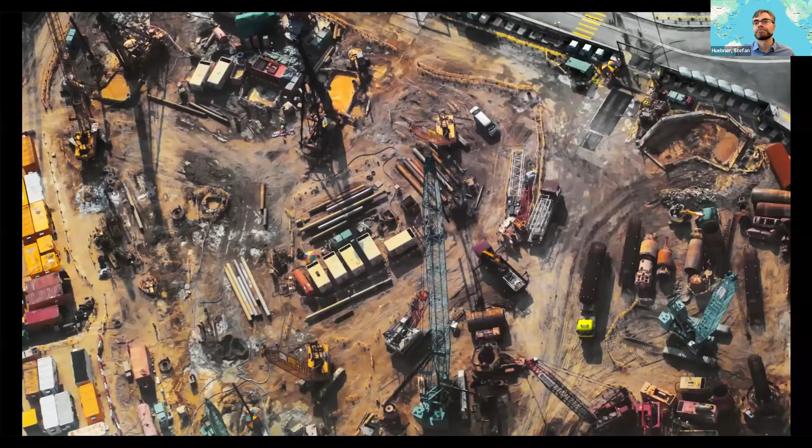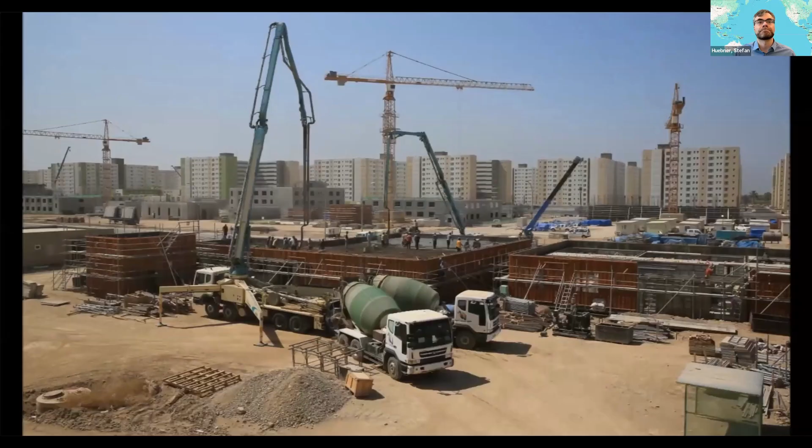That's why we manufacture off-site. Just like the automotive, aerospace, and energy sectors, we believe real estate too should be built in factories, in clean, safe, and precise environments. This approach removes the need for conventional construction sites, minimizes environmental impact, improves quality, and delivers projects faster.

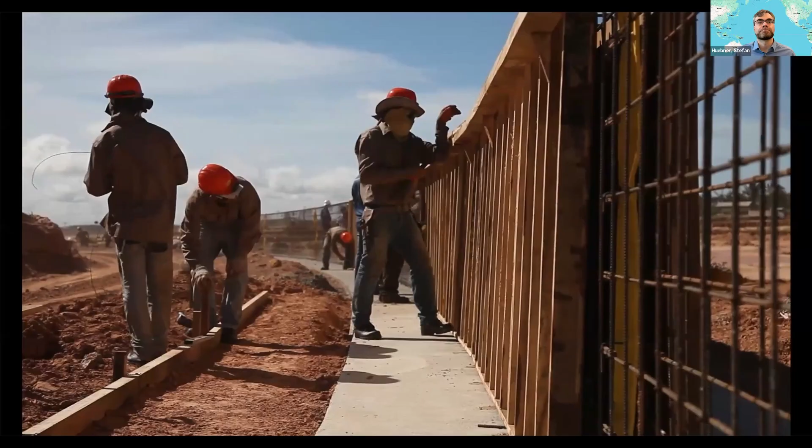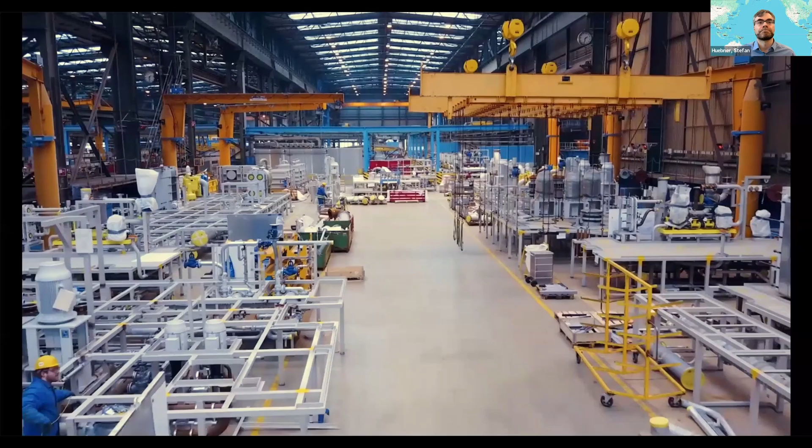From private residences to public infrastructure, our portfolio spans floating homes, hotels, and exclusive leisure platforms, eco-resorts and wellness retreats, floating port and harbor solutions, mobile hospitals, and offshore logistics hubs. Each solution is designed to enhance life on the water, delivering exceptional living, leisure, and infrastructure without disturbing the shoreline or requiring heavy site preparation. Unlocking massive potential for developers to create private, sustainable destinations.

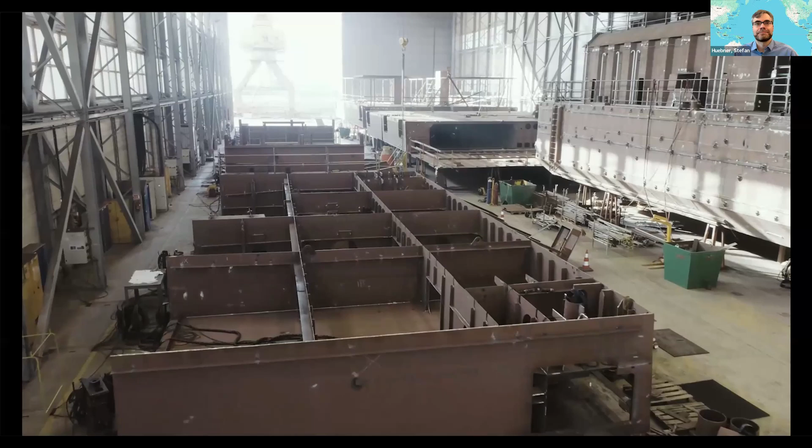Our iconic creations redefine life on water. In Dubai's Business Bay, our floating villas set a new standard for waterfront living, panoramic skyline views, private marina access, and sustainability at the core. Currently under construction, Oshaya is a next-generation floating entertainment platform designed for high-end hospitality, live performances, and iconic events on the water.

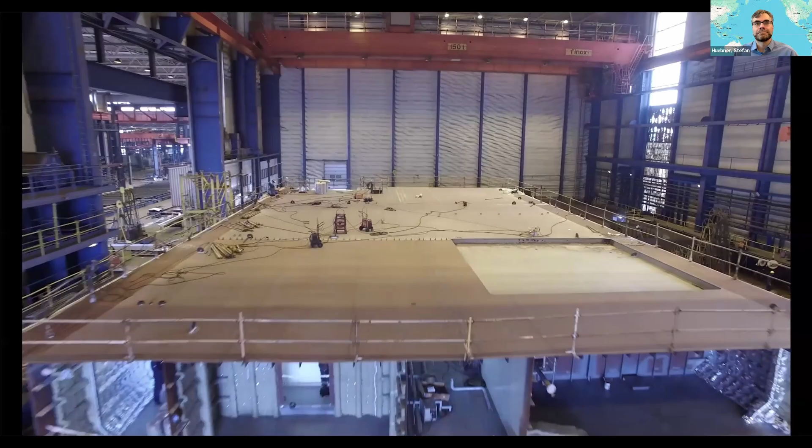We delivered a 10,000 square meter offshore island for the iconic Burj Al Arab, choosing a modular pile-supported approach that beat the conventional land reclamation option, setting new benchmarks for minimal environmental and operational disruption. And the world's largest floating villa, 6,000 square meters of self-sufficient living, complete with integrated power, water, and sewage systems and propulsion. Engineered for privacy, luxury, and autonomy offshore.

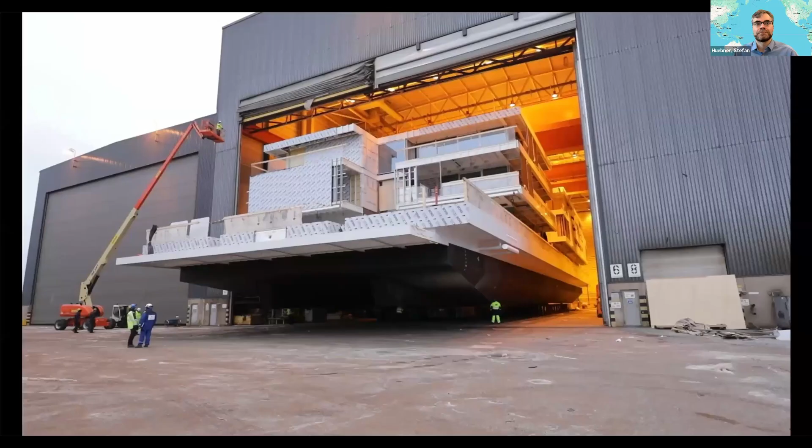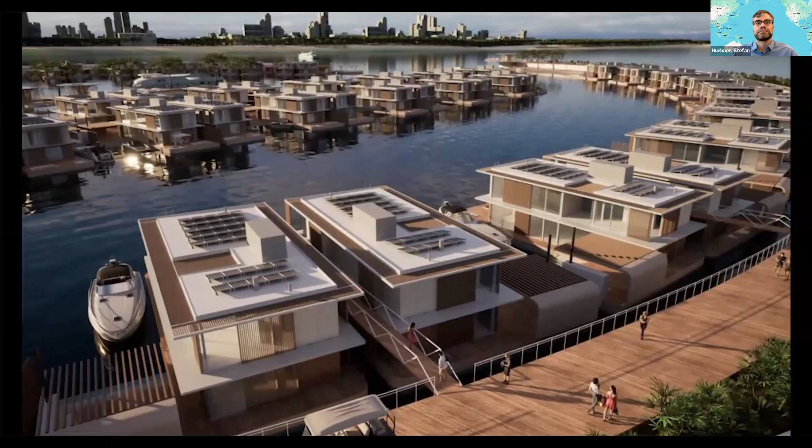All our solutions are manufactured and tested off-site, then transported and deployed with minimal on-site work. From cities to remote islands, our floating structures are built to perform in any climate, with speed and precision. We don't just deliver buildings, we deliver fully integrated floating assets, ready to operate offshore or connected to existing utilities from day one. Your vision, we design, build, and deliver.

All right, so I hope you guys enjoyed the video. Thank you for the patience to watch. But it's a good summary of our market positioning. We are positioned as, if we must describe it, real estate developers on the water.

The content, I'll try to be very brief to talk about these topics here. The two zones of business that we work for are infrastructure and commercial and residential. I will go quickly one by one through these 8 categories, 4 in the infrastructure side, 4 in the commercial and residential side. Then I will talk a little bit about city-sized solutions and explain very quickly how the shipyards will be the driver for the floating revolution.

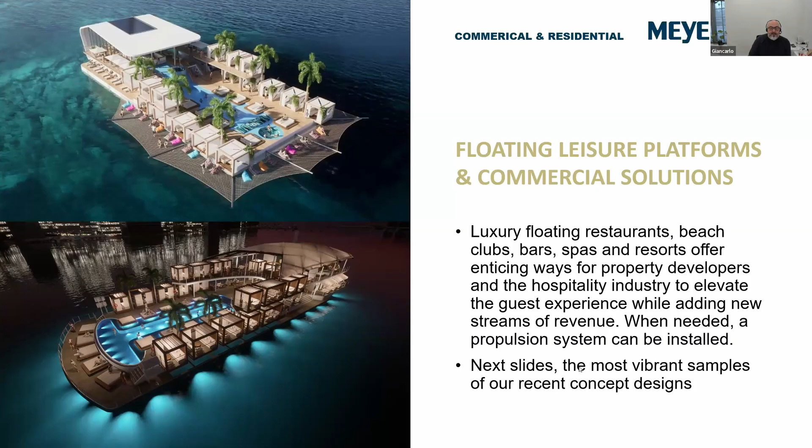This is our flagship so far, the beach club of the Burj Al Arab. It's an on-pile approach super platform. It's working very well, very successful project. This building was built in Rauma, Finland, in slices, transported over to Dubai and reassembled in place. The only part that is local, as you see in the picture, are the grass, the trees, and the water of the pools.

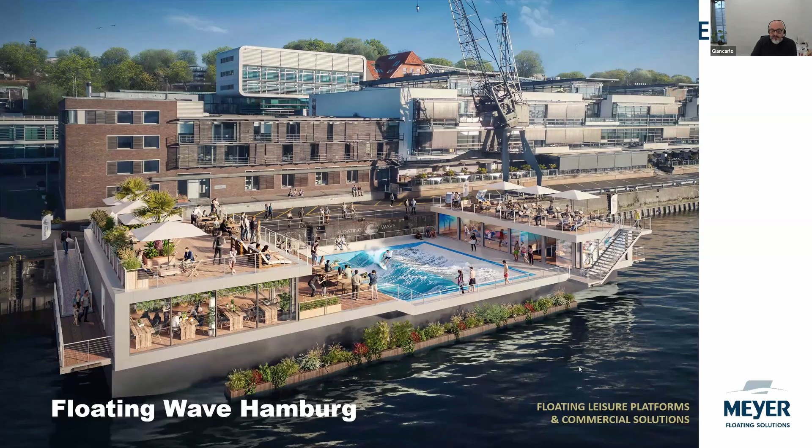More samples of different shapes and how the creativity flies when we talk about leisure on beach clubs. In the pictures you can see how and why this is booming. This is a revenue fountain. People love to go there, to be poolside and seaside, and they start spending money when they feel comfortable, surrounded by beauty and equipment that brings them near to the water, gives them the water experience. So they are happy to be in the water and they start to spend money. Sorry for my direct approach, but this is how the market goes, right?

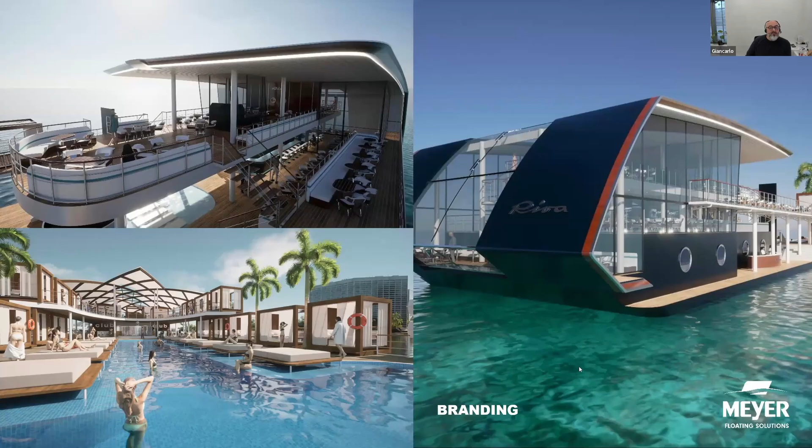This is a good sample of branding, how we twist our design to match specific brands. In that case, we have the famous classic boats from Italy, Riva. We twisted our successful Solstice design to the Riva, and below you have a tropical approach of the same platform. You cannot tell, but these two projects share the same platform. They are just twisted to different brands.

It's made to please the eyes of cruise ship guests. The cruise ship would navigate around this island, so people will see it from outside, then moor nearby at anchor, and with tenders they would join this amusement park, floating amusement park. So this is driven to the cruise ship public, as well as land local customers.

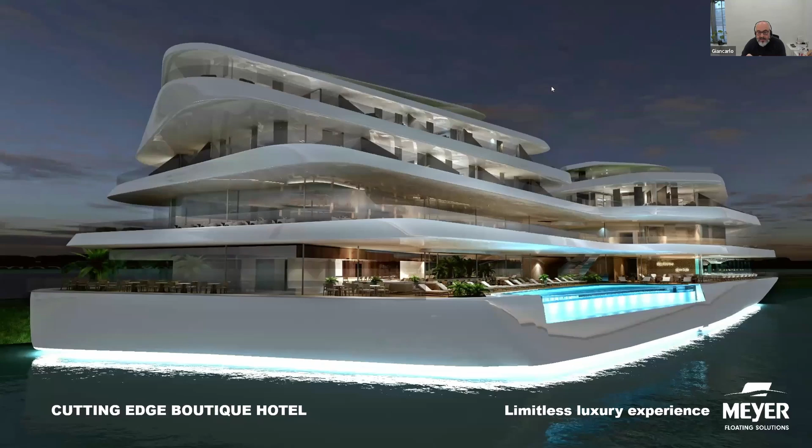Then a little bit about hotels, a very important piece of the leisure entertainment business. We have been developing concepts of all kinds. This is our most luxurious concept developed, a budgetless concept for a boutique hotel. Then you have 3 other concepts with totally different approaches.

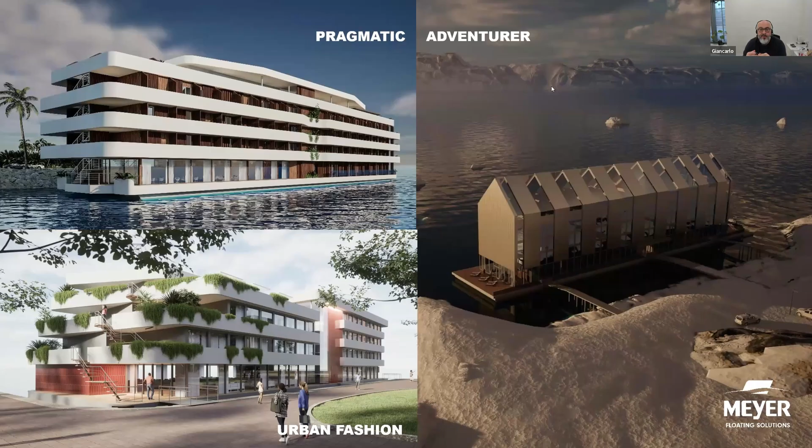This is our latest adventurer concept, for Lapland. It's a 12-month-per-year experience on the ice and on the water, and it counts on an archipelago of different saunas and cabanas all around.

Then about villas and residential solutions. Residential solutions, we are talking about more than one home in an island, in a platform, right?

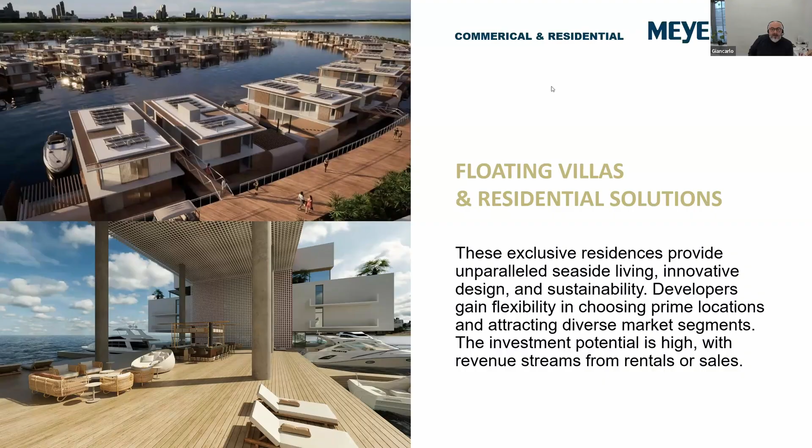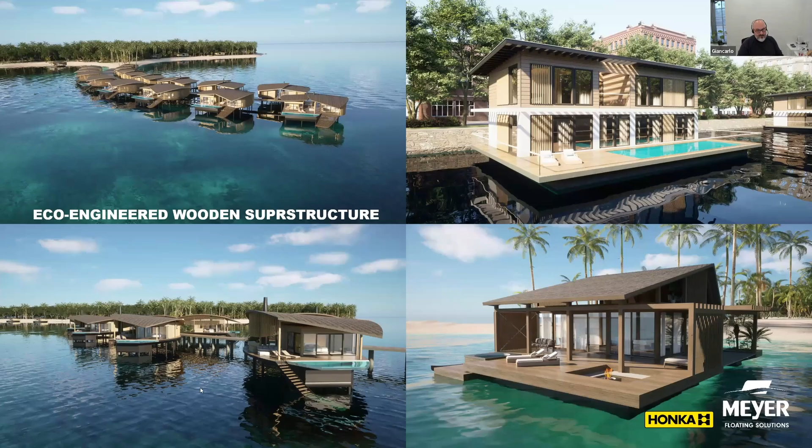Here is our latest conceptual effort: an eco-engineered catalog of villas, 7 different designs of wooden superstructures and steel pontoons, designed for resorts, for wilderness, and for urban centers. They are all made of wood together with Honka, one of the best prefab wooden house builders in the world.

One more view of the possibilities of these wooden villas. We can build on piles, build floating, or build on the beach sands. We can prepare a pile frame on the sand, and with long arm cranes, install the villas fully built off-site, on top of these pillars in the beach sand. Again, I'm reinforcing here: we do the local surveys, the design, construction on site, logistics, installation, and the startup at the site.

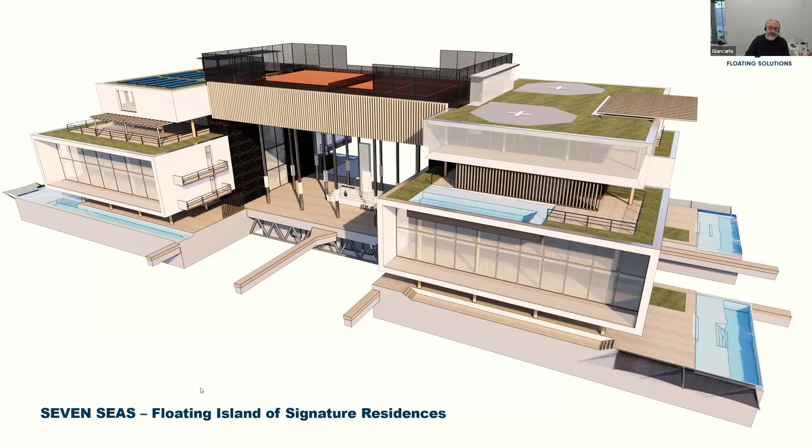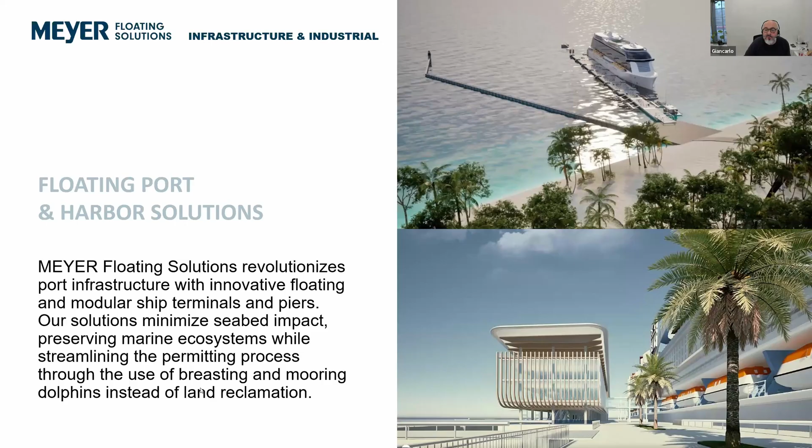Then a bit on the infrastructure side. We have a suite of solutions. If you guys have been at the latest Congress in Espoo, Finland, that was my presentation: solutions that enhance port operation for cruise ships. This is the basic idea, a hybrid solution where part is fixed and part is floating, but everything is built off-site and installed in place.

A bit on the anatomy of each part of this idea. We can see the regular dolphins and the floating pontoons, and two kinds of breakwaters: one for soft waters and one for heavy waters. You have the caisson type on the right.

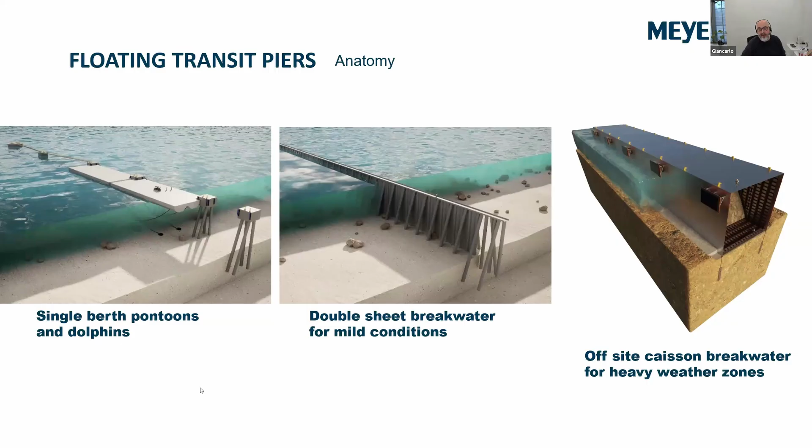This is expanding the idea of the floating disembark port. It's the transit pier taken to the leisure level. We simply develop leisure and service facilities in the floating port, in the floating quay, with an amusement park, science park, and beach club. The idea here is to buffer the public away from the beach, so the public will access the beach slowly and in an organized way, visiting the island, which is a natural sanctuary.

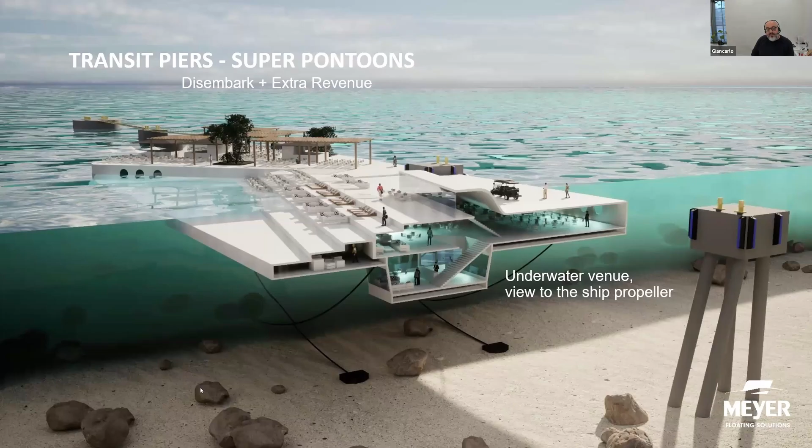This is a section through the same project, showing that we also have underwater venues.

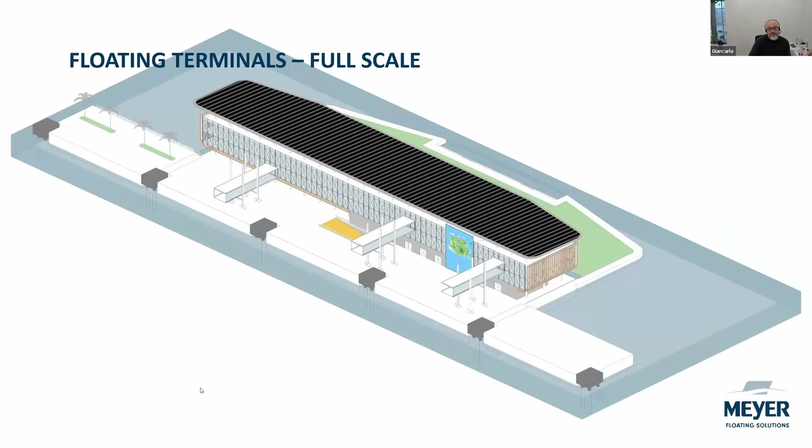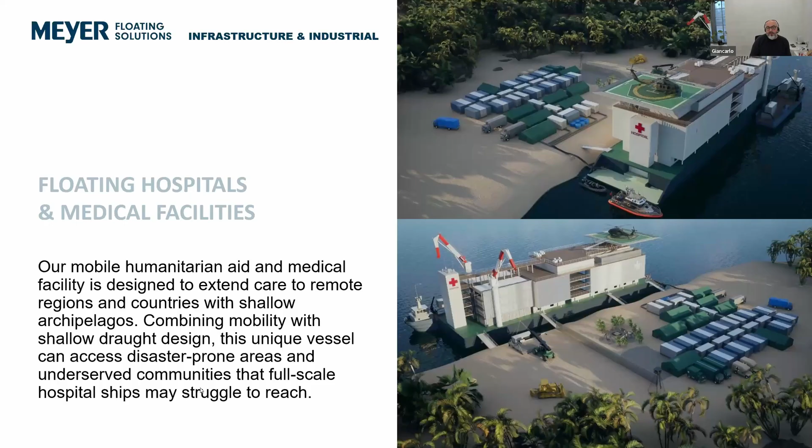Another product we're very proud of is these different solutions for hospitals and medical facilities - in that case, a crisis solution for earthquakes, tsunamis, and wars. It's a hospital assembled on a barge with flexible draft, so you can beach it very near the sands, and you can deploy two military-grade hospitals on land.

And all kinds of infrastructure we have been working on. In the upper case here is a data center which uses seawater to cool the equipment, and underneath you have a flexible service platform for desalination and power generation.

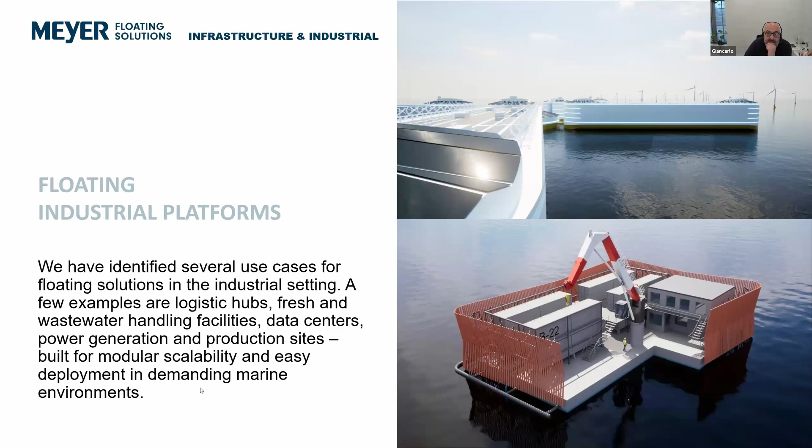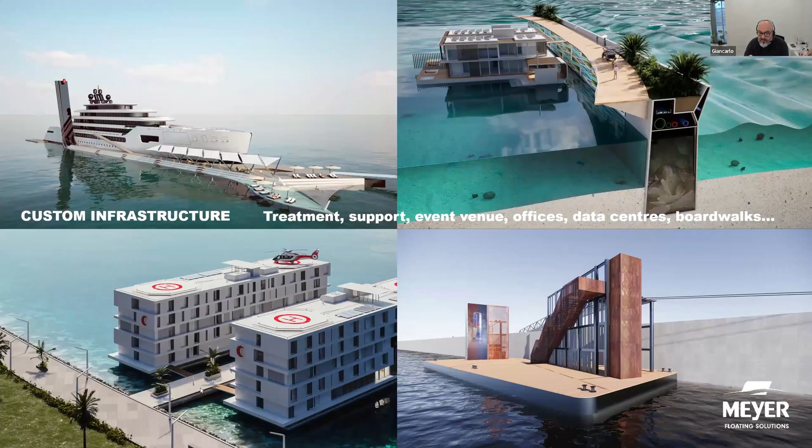More samples: we have infrastructure assembled along a walkway, all on piles, with a small bunker below for diesel. And all kinds of different solutions - caissons, stairs for rivers with very wide tide variation. We designed these beautiful stairs.

We have another kind of hospital, in that case totally suited to Muslim culture. And we have the ultra luxury disembark transit piers.

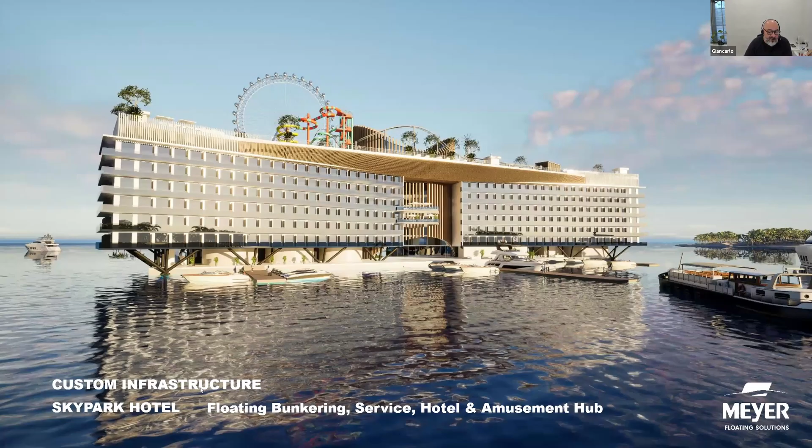Just some samples, and this is one we like a lot as well - an ultra utilization of a bunker platform. It's a very deep hull here, bunkering all kinds of things, and on top they have offices, a hotel, and an amusement park. This is the maximized utilization of a bunkering platform. It's the Skypark Hotel.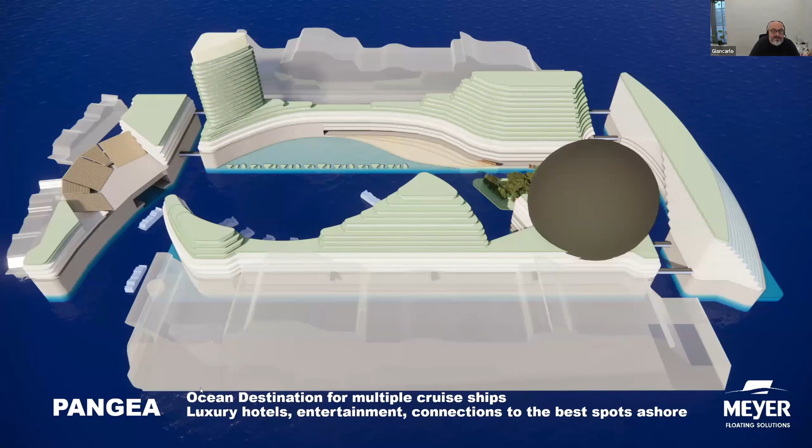And this is very low detail in this image because it's a bit of a secret. Actually, it's an actual secret. It's entertainment. It's the same concept as the terminal, but for passengers. It's a suite of attractions that will work itself as a destination.

Do you want to do questions now, or do we want to go on with the next presentation? It's up to you, I don't know. I would suggest now, because if they see all three presentations, they will not remember what question goes to whom.

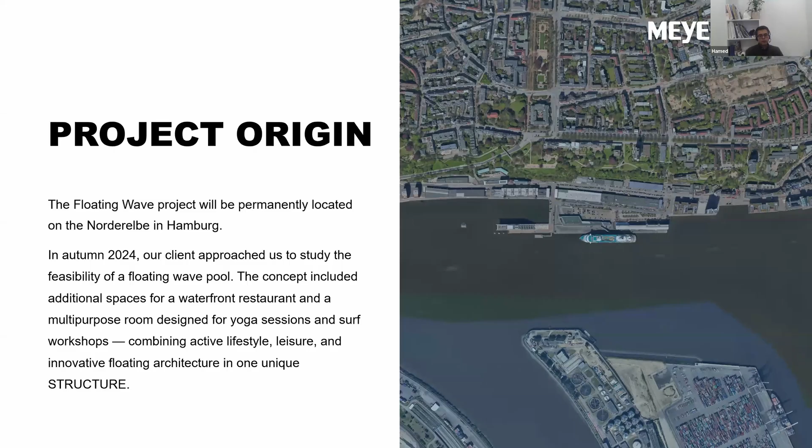I would like first to quickly give you some background of the project. It was early autumn of 2024, maybe October, that we got the first contact from our client from Germany, who was looking for a feasibility or preliminary study for a recreational platform permanently moored in the Hamburg land, located in the Elbe River, exactly in front of the iconic office building Dockland. This is the situation after installation, which gives a good idea of the whole size of the platform.

The main idea of the project was to have three main functions on this floating structure. At the middle, the most important function is this surfing pool, and the client would also like two other functions: a restaurant on one side, and a kind of multi-purpose room which can operate as a yoga or exercise space, or a workshop room for surfing later.

After we received the first call, we started to study the location and site of the project. The first thing we noticed at the beginning was this very diverse water tide in the location - almost 4 meters different water level per day, and it happens 2 times like that. We have the lowest water level, and later in the day the highest water level.

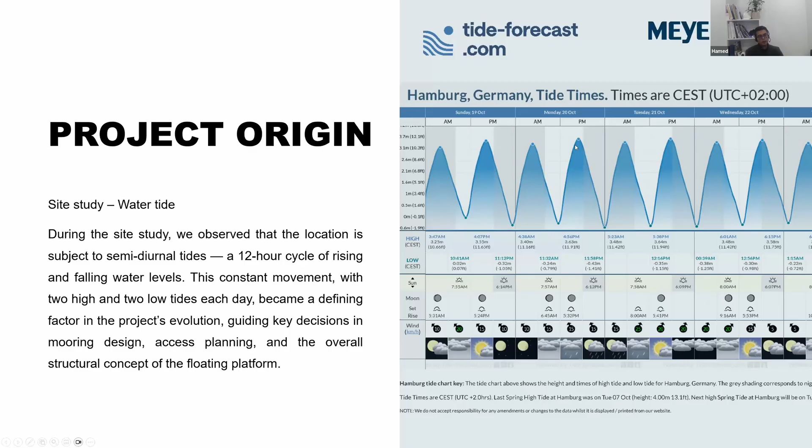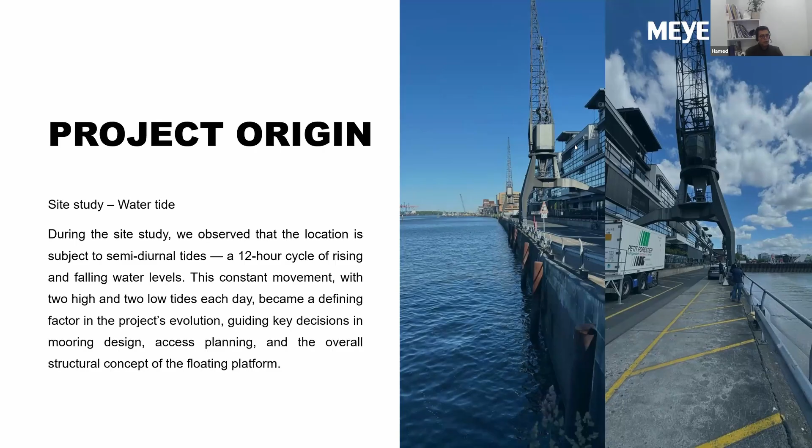This is a good example of seeing the differences. About 6 or 7 months ago I traveled to Hamburg to see the site for the first time, and I took the left side picture around 8 a.m., where you can see a very good water level. But the other picture on the right side I took around 1 p.m., showing how the water level is low, and you can clearly see the riverbed.

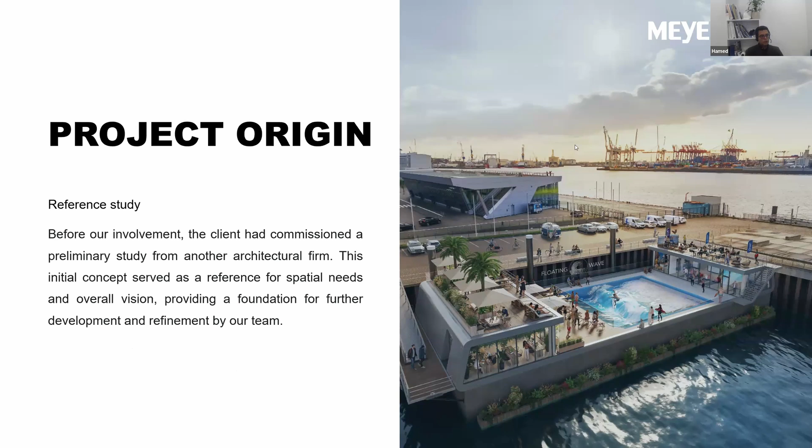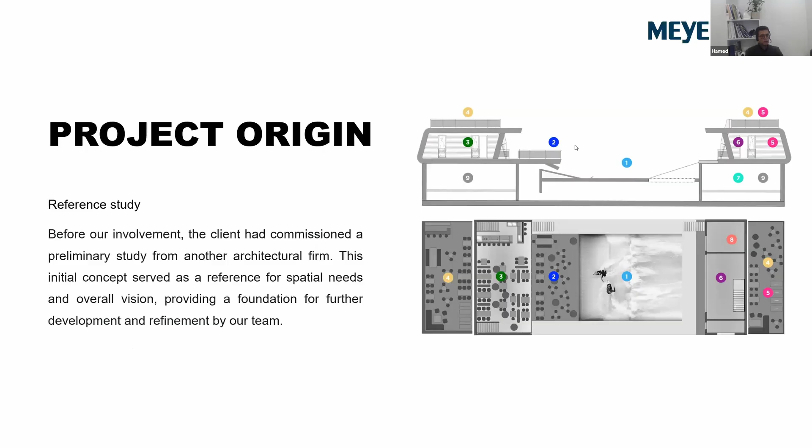The second important thing we were focusing on at the beginning of the project was the previous study done by the client in Germany. The other company did preliminary sketches for the client, which we also received and used as a kind of basis for our design, because it gave us the whole idea of what exactly the client was looking for.

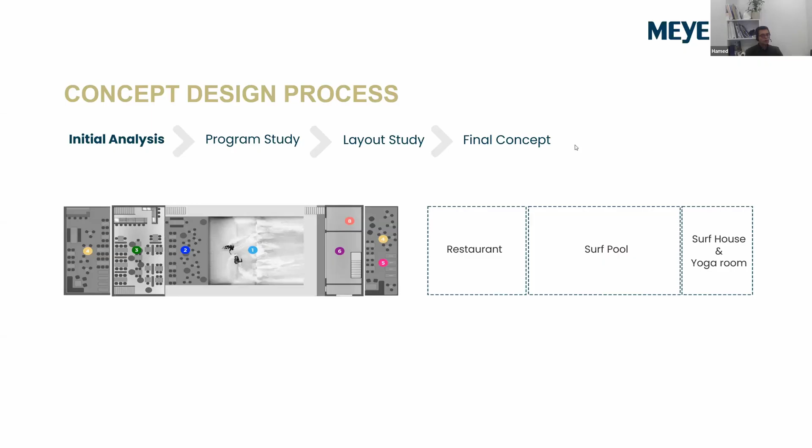So let's go to the design. First, as I showed on the previous slide, we received these sketches from the other company and started to analyze and understand them. As I mentioned at the beginning of the presentation, we had three main departments or functions on the floating platform: the restaurant, the exercise or multi-purpose rooms on the sides, and the surfing pool in the middle.

Then we started to go more deep into the program study. Based on the whole study we did for all required spaces for this project, we tried to create the DNA of the project - what kind of spaces we were looking for.

We have the back of house and front of house. All the back of house spaces can be stored inside the pontoon, which doesn't need specific access to daylight or direct access from the land. But we can keep all the client spaces, like the dining room of the restaurant and the main office or entrance room for the surf, on top - on the middle deck or on the superstructures.

Then, before studying the main geometry and design of the whole structure, the second thing we started to study at the beginning was how we wanted the connection between this structure and the land, because it's very important to consider that this project will be permanently moored and installed only once, remaining in the same position for the rest of its time. Maybe you need maintenance after 10-15 years, so for a long time it's going to be unmovable.

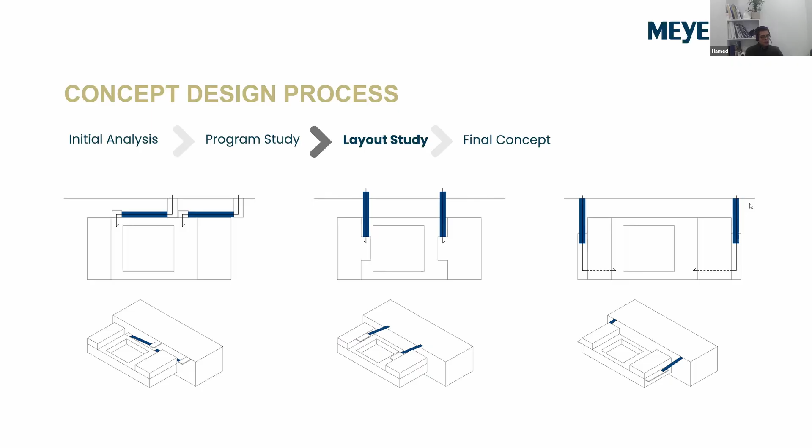After this phase, we came up with the development of the main structure. At the beginning, we simply created these boxy shapes - the pontoon, and then on top we have the two superstructures, and at the middle we have the pool. Then we added the connections to the land and a cantilevered platform on each side.

In the second phase, we started the optimization. We could reduce the use of steel for the pontoon, which is very important and a normal process in ship construction, in order to reduce the cost of the project - we do this optimization all the time.

We also got a better idea of how the surf pool actually works, which I'll show you later on some other slides. We noticed that in any case we needed some area higher than the rest of the platform, or the bottom of the pool on the other side, to create the specific angle for the water coming from the pumps - the main code for creating the wave on top of the water. So we needed two different levels on the main deck of the pontoon, which is how we arrived at this condition I'm showing with the mouse - this is the place where we store the pumps.

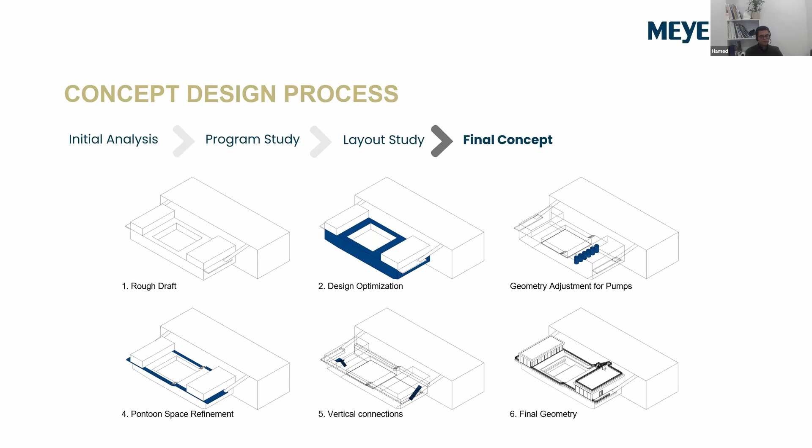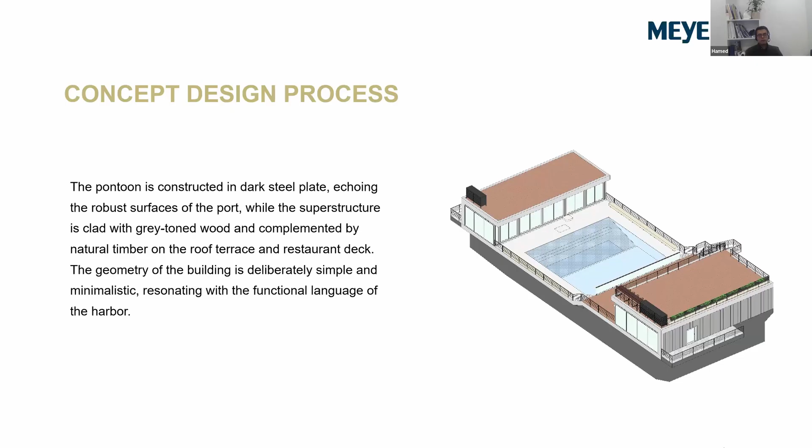So at the end, we get closer to the final geometry, looking very simple, but believe me, that is very challenging because of all these gathered functions in a super small compressed platform. It's very technical. We have the surfing pool, the restaurant, and all those back of houses for the surfing pool. And of course the whole nature of the project, which is something in between floating and sometimes being on pile, that later I will show you how it works.

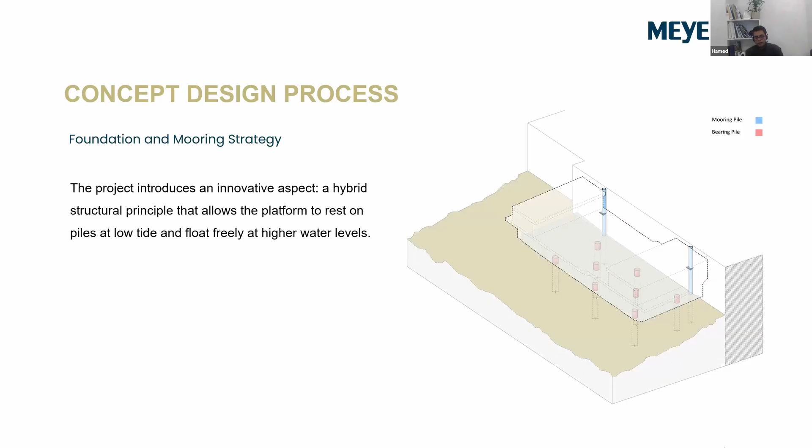Yes, so this is the main idea that we have. At the beginning of the project, I showed the situation with the water tide. In any case, we cannot float the whole day, so the idea is: when we have enough water in the river, we start to float. We have a specific threshold for floating, and it happens for a few hours per day. Then when the water goes down, we start to sit on the pile. We have basically 10 piles for sitting on, and 2 mooring piles that let us have this vertical movement with the water tide.

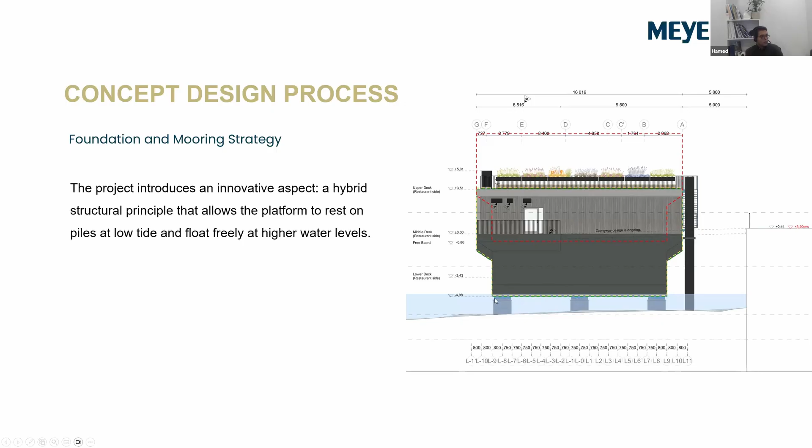So again, here you can see the connection and the different situations, different heights of the building, or different vertical locations of the building based on different water levels. As you can see, when the water is going higher, the structure is also going higher with it. This is the old idea we had.

Now we have a different idea, but we are still working on it. It was like we might need a kind of hinge at the middle of the gangway because of the water tide. So then it basically works as a kind of fuse, so that when the water is very high, instead of having any damage on the main structure and also on the bridge or gangway structure, this hinge at the middle starts to work. So then it makes it more controllable. But in general, in any case, it should be with the wheel and also with the hinge.

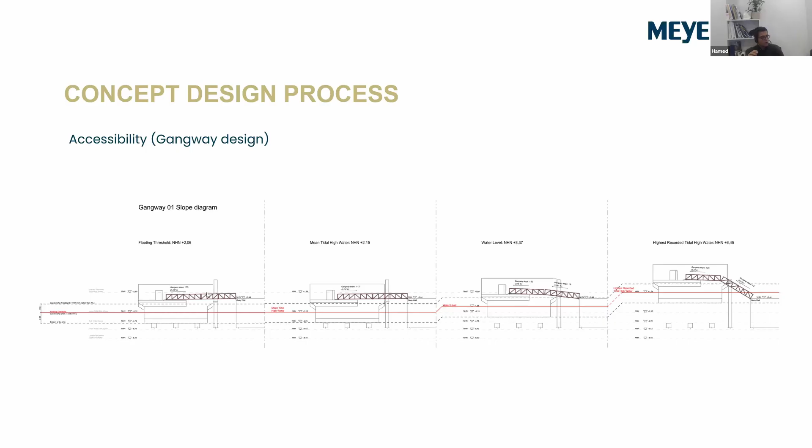So one side should be with the wheel and the other side with the hinge. With this idea of having these 2 systems on both ends, we can also have the liberty of having horizontal movement during the different water levels.

Yeah, so these are the layouts that we get. This is the lower deck, inside of the pontoon. At the middle we have the pool. Here you see all the pumps, these 6 pumps. On the left side, on top, we have the welcoming desk of the surfing pool and also the yoga room or multi-purpose room. Beneath it, inside the pontoon, we have the specific space for that purpose. Through these steps, people come down to access 2 sets of shower rooms, changing rooms, and we also have unisex toilets, the filtration room, and one big storage here at the end.

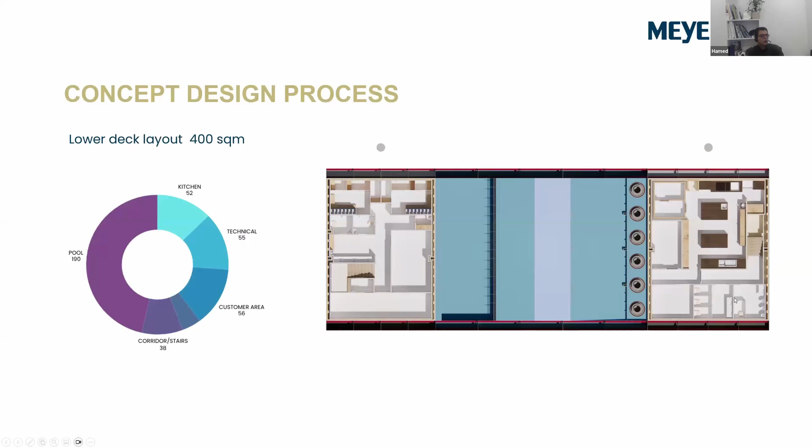On the other side, we have the restaurant. Below it, we have the main kitchen of the restaurant, cold rooms, transformer room, technical room, and again 2 sets of toilets for the customers.

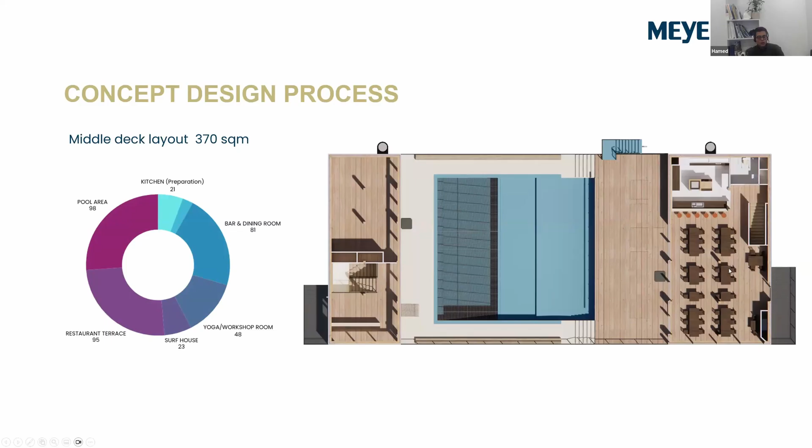On top we have the superstructure. Again, on this side we have the welcoming desk and the yoga area. Now we don't have these 2 columns at the middle, which is better. On the right side we also have the main dining room for the restaurant, and the whole terrace of the restaurant can be operable during good seasons. On top, we have the rooftop terrace that can also be used during the good season.

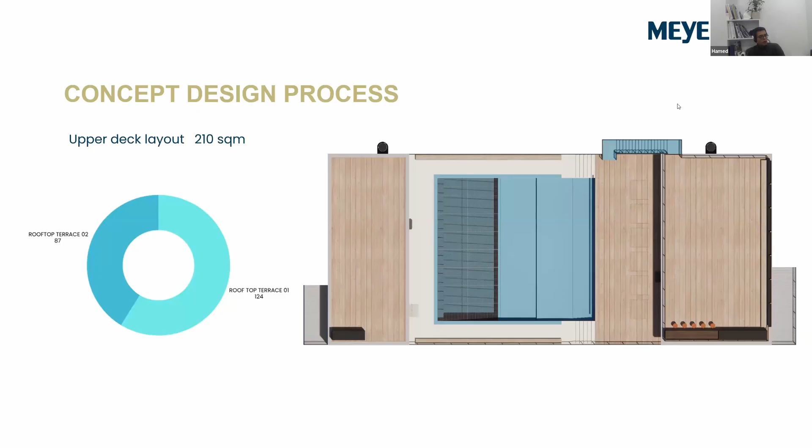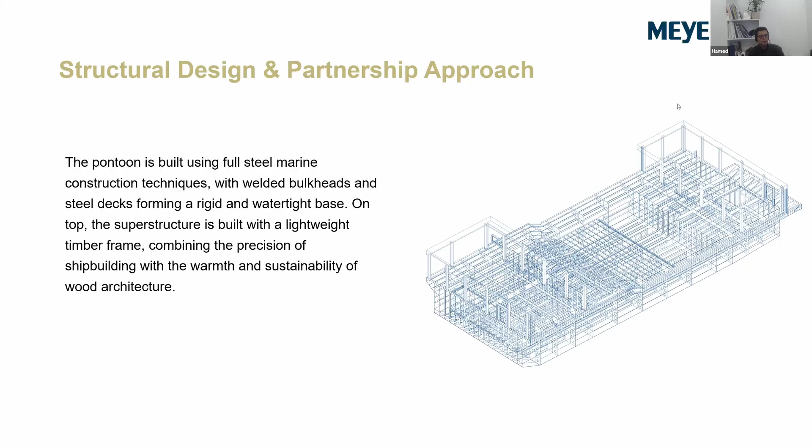Basically, the whole pontoon is a full steel structure. We're going to use exactly the same system and technique that we use in shipbuilding. We're going to use the bulkheads and also the steel deck. Very simple—we have the steel, and then we have the reinforcement elements, the stiffeners, and on top, for the superstructure—but before going there, I would like to explain a little bit more about this idea of the surfing pool.

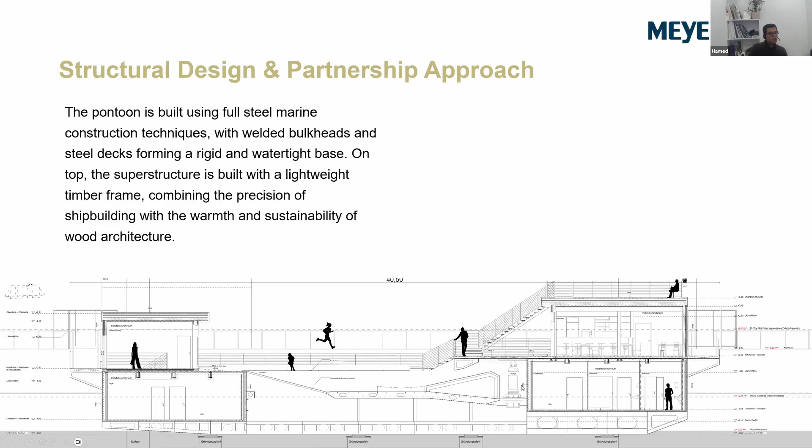At the bottom of the pool, we have suction pipes—probably with the filtration system we're going to use, we might need to do one filtration per week for the whole water we have. We send it to this room through these pipes, and after filtration it comes back to the main water circulation. The whole of this system is integrated into our steel structure.

The other interesting thing about this project is that, apart from the steel structure for the pontoon, we have this log-built structure on top as the superstructure. For this specific project, we have our partner Honka, a famous company here in Finland, who is taking part in providing and manufacturing the log-built structure for the superstructures.

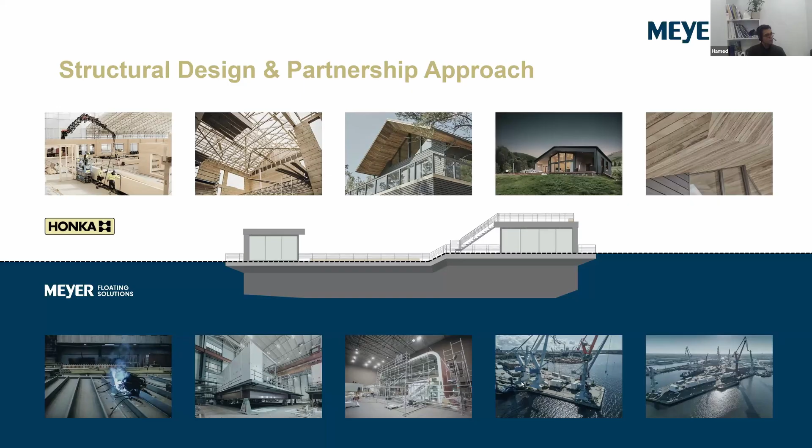So basically, I can say that we have three main different structural types. Here you see it's all steel structure, very simple—we have the main steel, the stiffeners, insulation, and the lining wall.

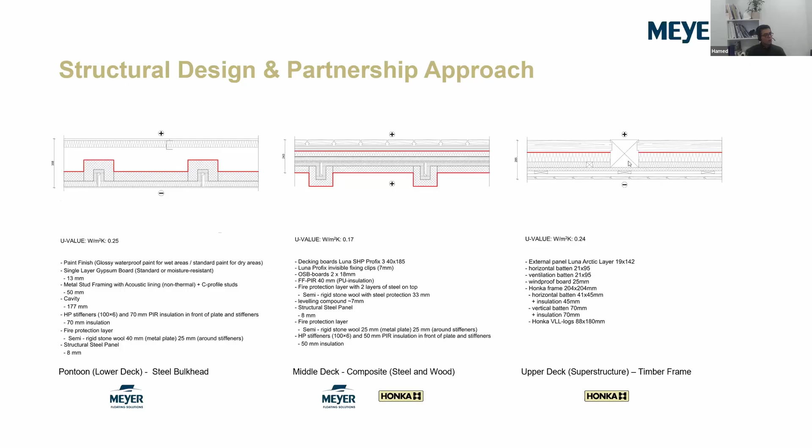And then at the middle, we have the composite elements—that's the place or level where we are meeting these two different structural systems, the wooden structure and the steel structure, and on top we have only the wooden structure. So to make it more clear: we have all steel, then we have the gray zone here, and then on top we have all wood.

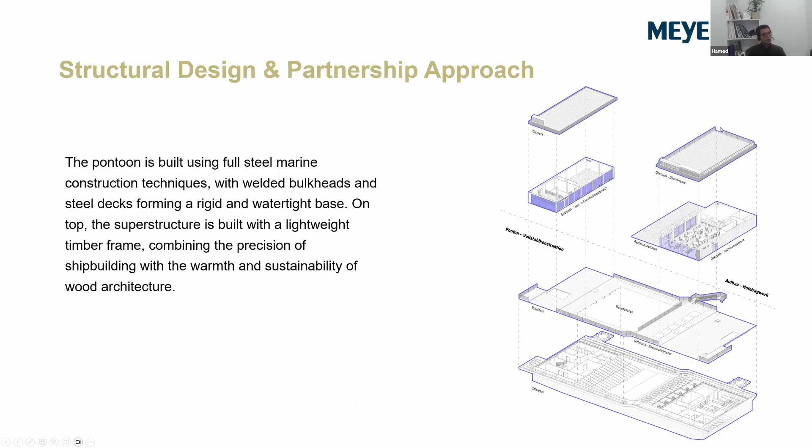So let's go with the challenges. I can say that the biggest and most important challenges were these two groups: the technical engineering challenges, mostly related to watertightness, and the nature of the project, which is a hybrid project—it's going to be floating and on piles at times.

The second group of challenges is the lack of regulatory clarity, because we are something in between. We are not offshore, we are not on land. We are on the water, but permanently connected to the land. We are moored, so we need to follow the regulations on both sides, which apply also to the project and the building techniques we are using.

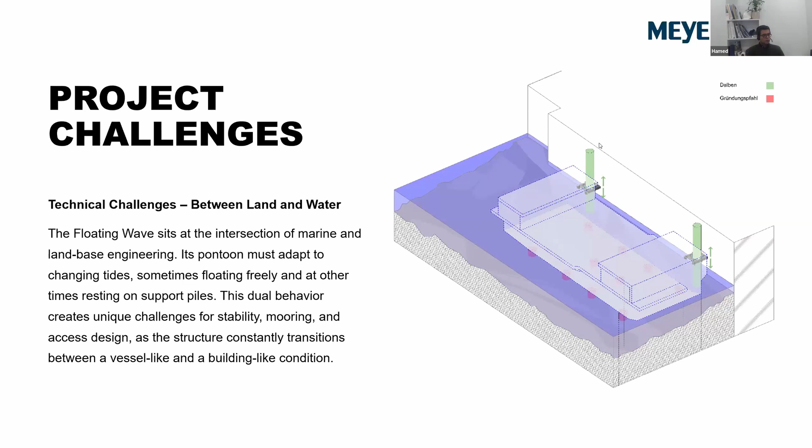Let's focus on the mooring and piling situation. In this diagram we have 10 piles for the time we are sitting on them. These are the load-bearing piles, very long, almost 25 meters, going down to get enough reinforced soil. With the green piles, we also have the mooring system that lets us move vertically without getting closer to or farther from the quay wall.

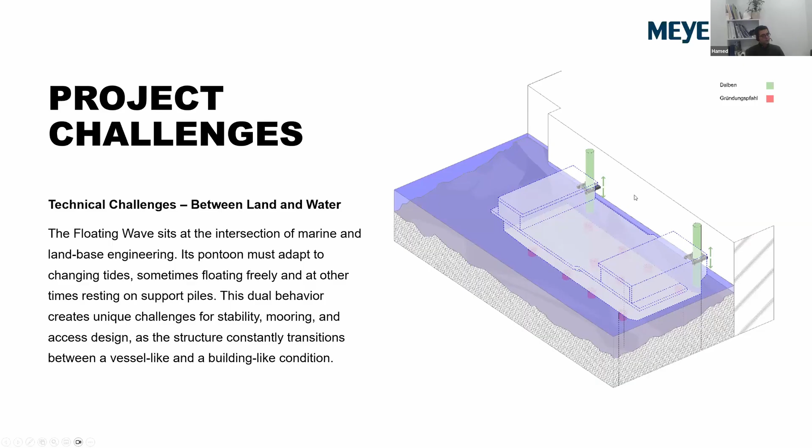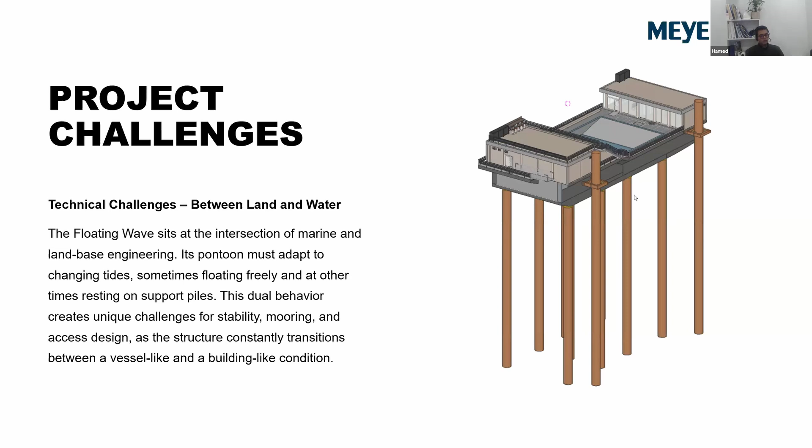This is the whole situation with the length of the piles, based on the survey and soil profile we received from Hamburg. As you see, they are quite large, and the diameter is also bigger because we don't have very strong soil.

We have clamps that help with the vertical movement through this rolling system. One of the other challenges is that during winter time, they sometimes get frozen, though there are several solutions for that. This causes more horizontal forces on the mooring piles, which is why we needed to keep the mooring piles the same diameter as the load-bearing piles.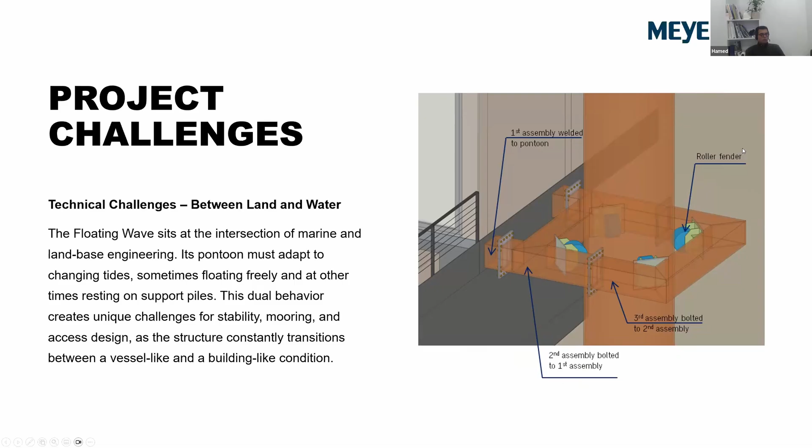This is also a very interesting section, because another challenge is the positioning of the structure. We cannot get too far from the land because of the gangway connection we want, but we also cannot get too close because of the possibility of crashing between the pile and the foundation of the quay wall. Here I'm showing the old quay wall, and later they added this part to protect the old one.

This line shows the section of the piling sheet they have in Hamburg, under this piece of concrete, which goes down but is inclined at a specific angle. So at some specific level we get very close, and this is one of the challenges we are currently looking at solutions for. Maybe in similar projects in the same type of locations, mostly in European countries, where we have very old, fragile quay walls protected by a newer added wall, we might see similar challenges.

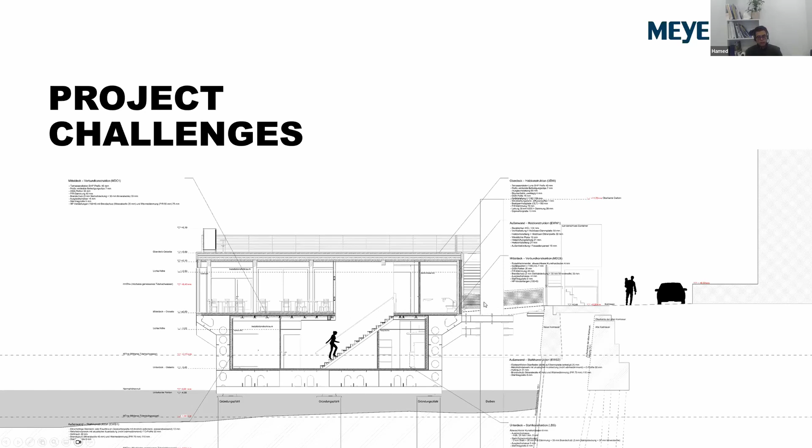Another challenge was that with the piling we somehow solved the watertight problem, but one challenge remains: the installation. You'll see it clearly in the next slide. Here you see the lightweight ship without any people on board and without water inside the pool. With the threshold, when the water level is at plus 2.15, we get this much gap between the load-bearing pillars and the pontoon.

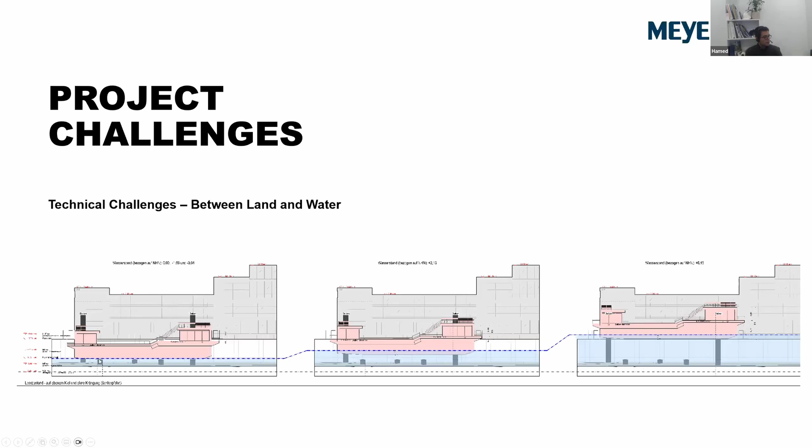When there is a flood, we're at this position, and when the water is lower than this, we are sitting on the pile — that's the moment we can do the installation, which requires the water level to be higher than 2.15. Based on this diagram, which you can track online, we only have this time window each day to do the installation, which isn't very long compared to the whole day. This is one of the challenges — how we can solve this for just the first installation — but I'm pretty sure we'll find a solution.

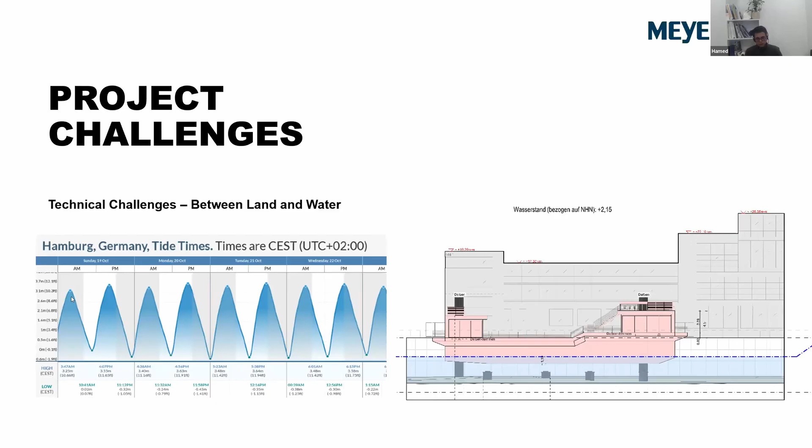Let's go to the regulatory problem. I'd like to give you one practical example we faced during the design phase. Because we are not on land, and not exactly offshore either, we are on the water but permanently moored and connected to land, we don't currently have any specific set of regulations or frameworks from the cities. This is, in my opinion, one of the challenges the cities should consider, and also the suppliers of materials and construction techniques, because we're going to see more of this sort of permanently moored structure.

For example, in this project, for fire safety we needed to follow the EN code, which was required by the city of Hamburg. In the EN code, they use an R rating system for the stability of load-bearing elements against fire, like R30, R60, R90, and also EI30, EI60, EI90. I won't go into the differences between them, since those are for land. But for ships, there's a different system: A30, A60, and different classifications like class B and C, each with different aspects.

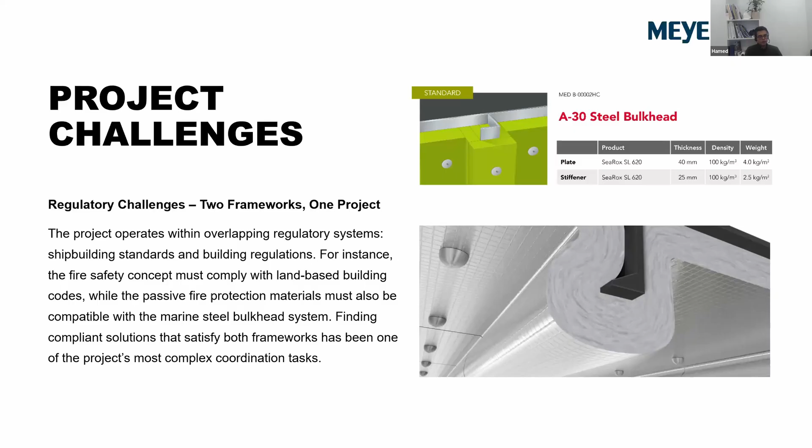...usually all the materials and elements we use in ship construction are overestimated compared to land standards, because we're building structures floating in the middle of the water, essentially in the middle of nowhere. So we must be more careful about dangerous situations than land-side constructions are.

So these are the two groups of challenges we're facing: those related to being hybrid, something between floating and on piles, and the same situation of being in a gray zone of regulation—not absolutely on the land side to follow land regulation, and not absolutely on the water side to follow marine frameworks as the main basis of regulation.

Well, I'm done. Thank you so much for listening. I hope it wasn't very boring.

Thank you. Thank you very much. Clapping again in the name of the muted audience.

Do we want to check briefly for questions? For sure, if there's any question, I'll be happy to provide an answer if I can.

So we have two questions here. The first is in the chat from Judy P., not directly about the presentation but more generally about Meyer: could you share more ideas if you have any eco-related platforms? I guess this includes maybe floating planters with vegetation, or here in Southeast Asia, floating mangrove structures, or eco units, or microhabitats for marine organisms installed on the submerged parts, something like that, I guess.

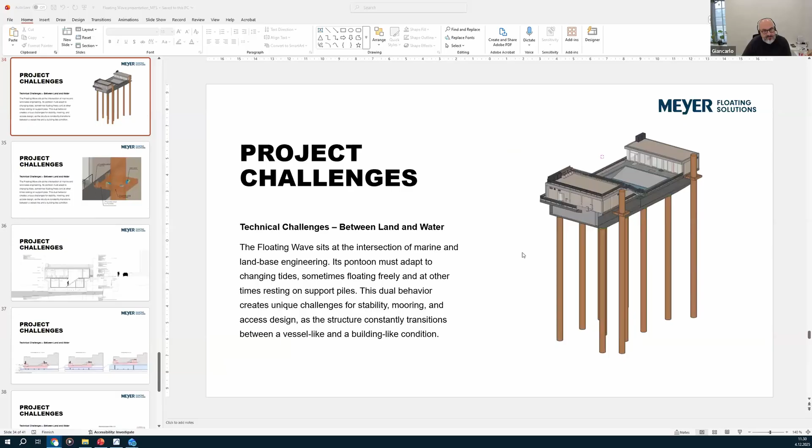We are very much driven into real estate and investments. Our contribution to fishery, food and plantation is on the academic side. We support academic studies with buoyancy studies, but only in the study side.

Okay, thank you. And then a question from Yannick Hassabier: great to see the floating wave taking shape. What is the current stage, and what do you need to proceed? Are all permits in place despite the challenges?

Well, yes, we are very close to applying for the building permit. Maybe latest by end of next week, we're gonna do it. We already created the profile for the project at the Hamburg city. And yes, we don't have so much challenges at the moment for applying for the permission phase.

Okay, thank you. And then Shu Xiang, do you want to ask yourself? Yeah, thank you. I have a question about this piling system, that it's flexible. Have you considered if, due to ground stability or whatsoever, it's not in place anymore? How can you keep the piling system vertical, as designed, over the lifetime of the structure?